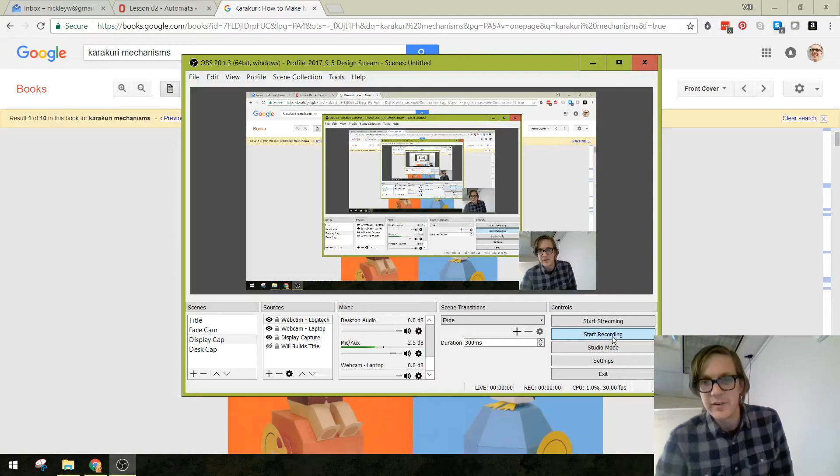So yeah, you guys have been busy making your own automata out of paper, mechanical moving machines. This is one of the books that I pulled some of these machines from. It's actually called karakuri, which I think is the Japanese word for little moving machines. It has a couple different meanings. Anyway, karakuri, automata, for this class, they're interchangeable.

Your assignment in class was to build one of these things, one of these paper models, so we can see how some of these common mechanisms work. If you don't finish in class, build them over the weekend and bring them with you on Wednesday.

Now, the other part of the assignment for Wednesday is to use SolidWorks to build a working assembly representing one of these paper models that you've made today. You don't have to build the one you built in class. You could build someone else's if it's easier for you or more interesting to you. I have a whole book of other ones too, so before you leave today, if you want to take a look at some of the other mechanisms and automata that you could build, just come up and grab one.

For today's demo, we're going to be in SolidWorks, and I'm not going to talk so much about how to build each of the components. With a semester and some change under your belt, building basic components should not be the hard part of the assignment. I'm going to leave that to you guys.

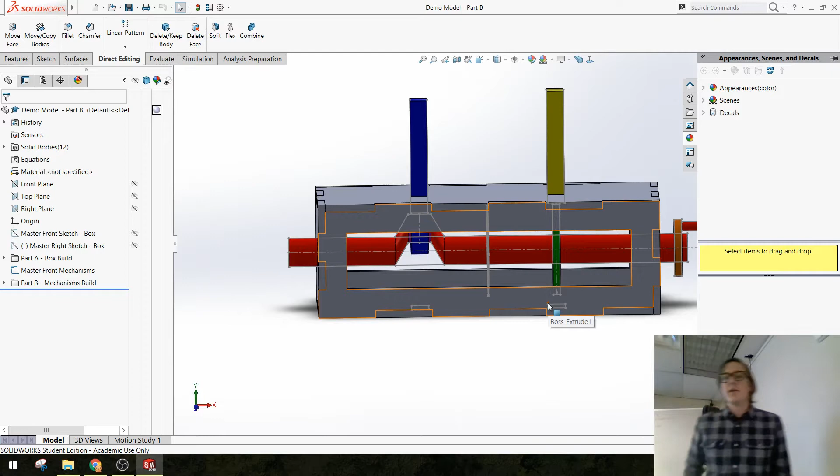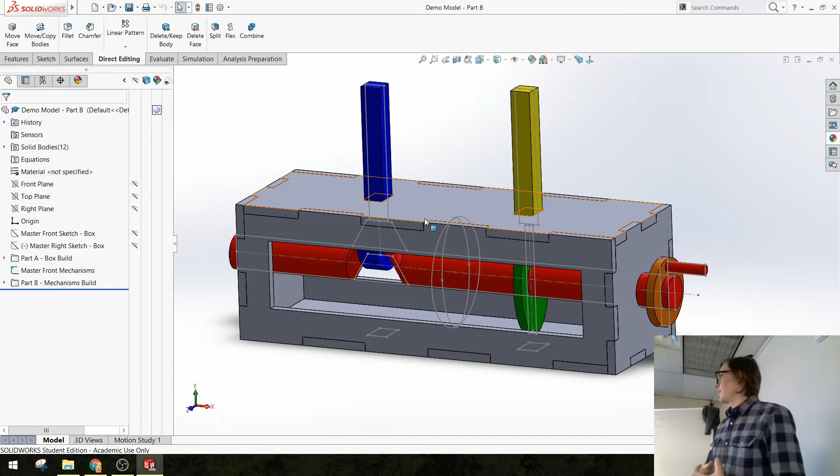While you guys were busy building your paper stuff, I started building two really basic automata mechanisms into my box model that was due today. I do want you guys to use your box model as the base geometry for where your mechanism is going to fit. This is all in a part file, so none of this stuff moves just yet. We're going to go over the process I would go through to export these as individual parts, bring them into an assembly, and mate everything together so that it actually works and represents these two mechanisms.

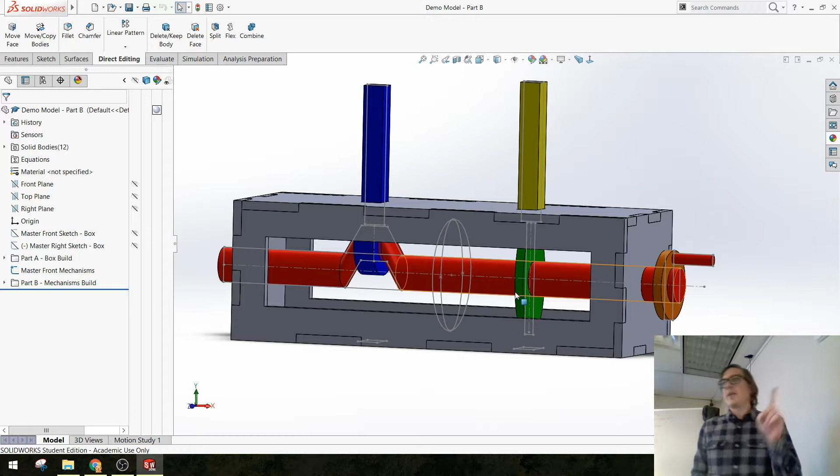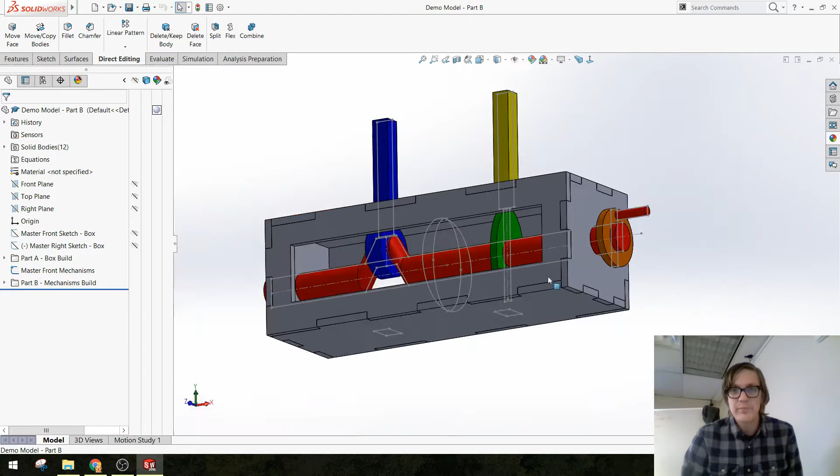You only have to do one mechanism minimum, but feel free to do as many as are in your paper model. As with most of these things, there's a drive shaft. In this case, it's this red piece with a crank on one end. So this is going to turn. The two mechanisms in this demonstration are a cam and cam follower. The cam in this case is just an oval cam. If you can't imagine what the cam follower's motion might be when this shaft turns, we'll see pretty soon in SolidWorks.

The other mechanism we have you could describe as a crank. It's an offset of our drive shaft, and then we have a member that's tied to one end. You could probably find an example of this in your paper models. A lot of you guys are doing cams and cranks. There are other types of mechanisms that aren't in this demo but that you're more than capable of building, things like gears and rack and pinion. There's a lot of other really cool things out there.

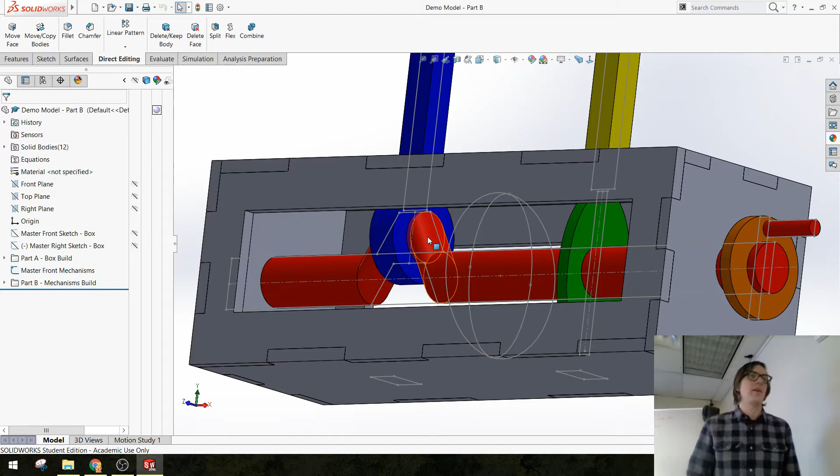So definitely try and build something that you've actually built in paper for this next assignment, to take some of the guesswork out of it. But for the later parts of this assignment, don't feel limited by just the two examples that we're building today or that you build in the next few days for part B of lesson 2.

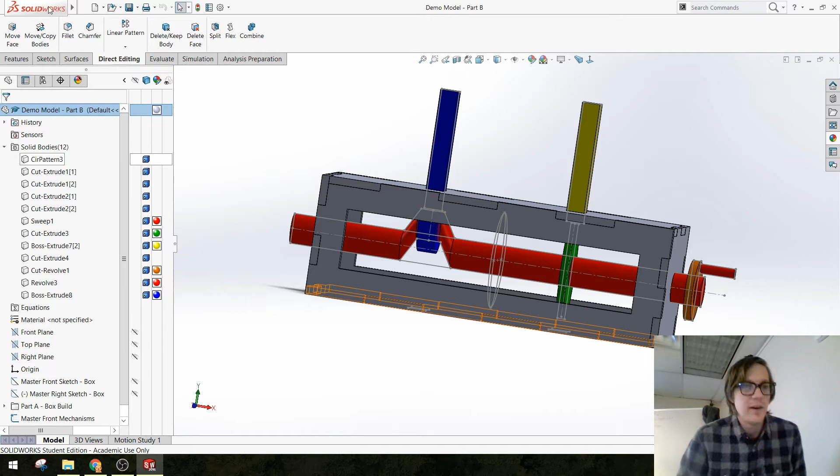Okay, so right now I have a part with a bunch of different solid bodies. There are a lot of ways to export bodies from a part as individual parts so you can bring them back into an assembly. I'll show you the way I typically use. One thing that'll make your life easier is to go into your solid bodies folder and name these something that makes sense to you, like box bottom.

I'm just going to go through and label everything: box front, box rear. The reason I'm changing the names is that when I export them, they will keep the name that I gave them. Let's see, box, I guess we could say left side.

Box. Right side. Drive shaft. Cam.

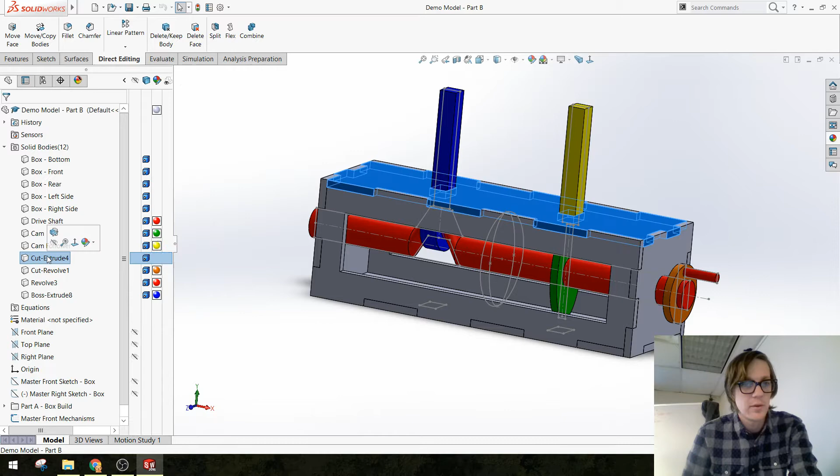Finished? You got two finished guys over here. All right, cool. Actually, I might borrow one of these to show in the video really quick.

Does it not have a box? Do your instructions have instructions for a box? Weird. So no, I guess yours doesn't have one. Drive.

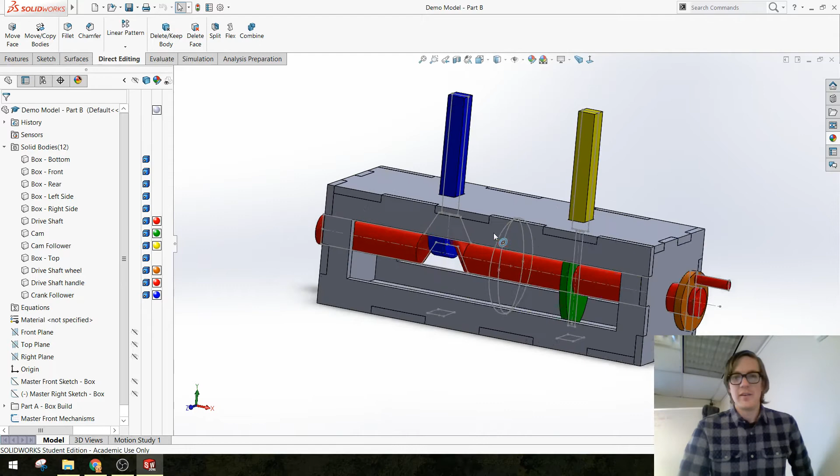Okay, so I've named all of my solid bodies here, and the easiest way to export these is to pick them while holding shift, right click, and then say insert into new part. And you know what? There's another way that we can do this too.

Yeah, insert into new part. That's fine. Okay. And it's going to ask you to put it somewhere. I'm going to drop this in a folder for part B.

All right. I wonder if I can do more than one at the same time. No. Okay. So I guess you do need to do this one at a time.

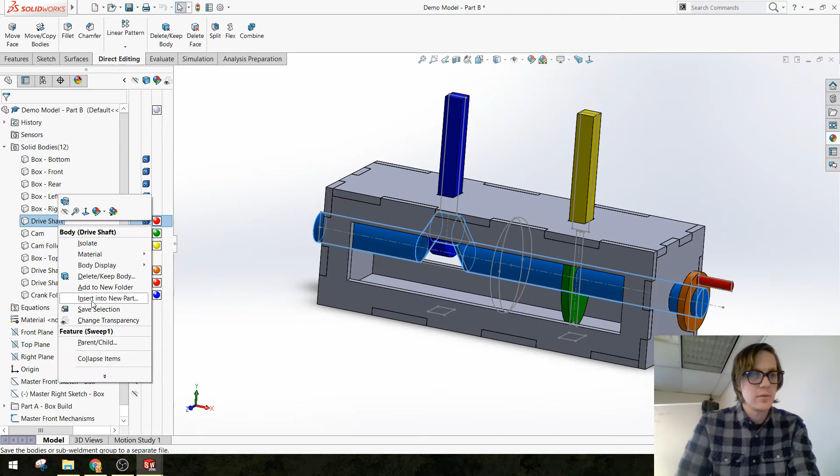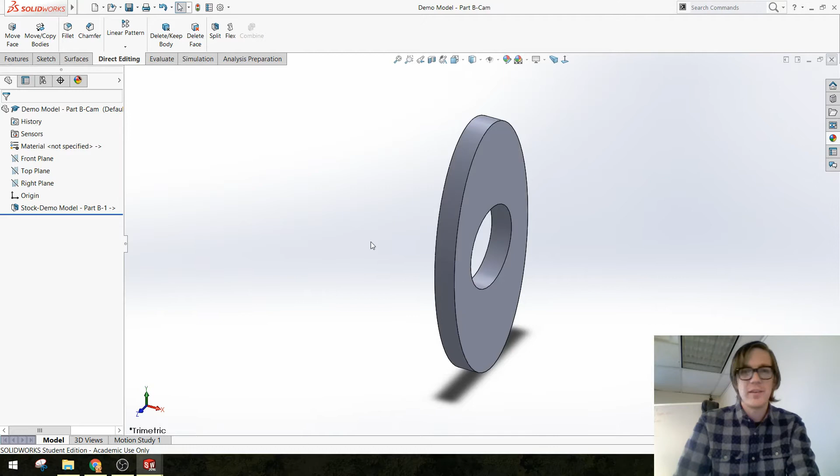All right, the reason we're exporting all of these bodies as their own separate parts is so that we can bring them back together in an assembly and add mates to make them behave the way we want. Yet another kind of tedious and annoying part of SolidWorks.

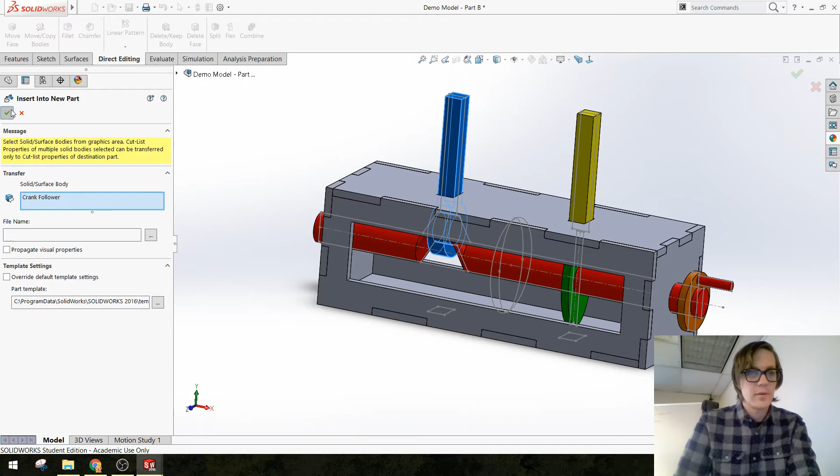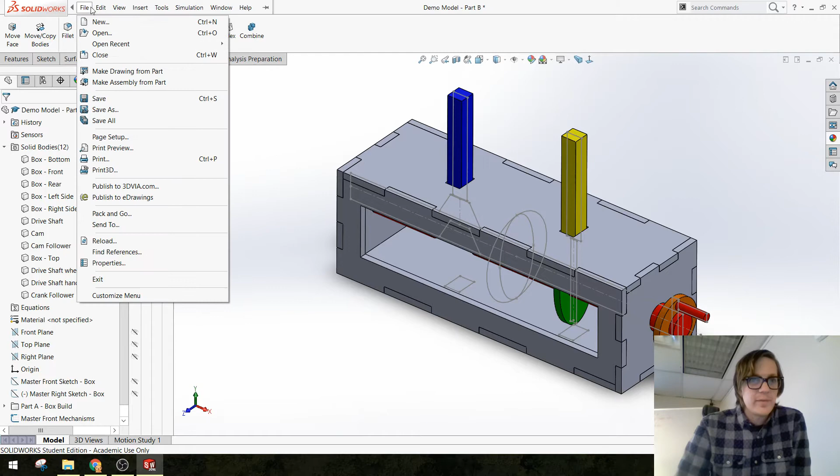lay it down anymore. Okay, so now I'm going to start a new assembly. And this is sort of the process here. Go ahead and start an assembly with nothing in it, and you're going to start inserting components. So I'm just going to browse for my folder full of parts that I just exported.

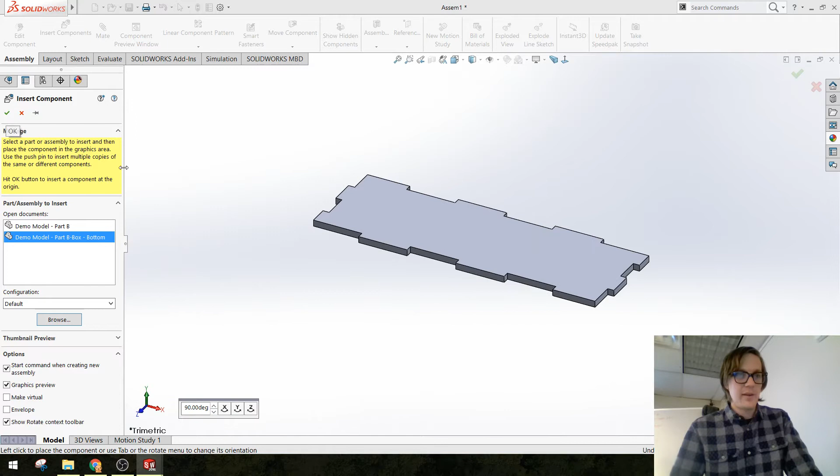And I might start with the bottom piece, and I can place it somewhere, or I can just hit the green check mark and it will lock it in place as the bottom. That's what I want to do to start. So I'm going to build up this box first.

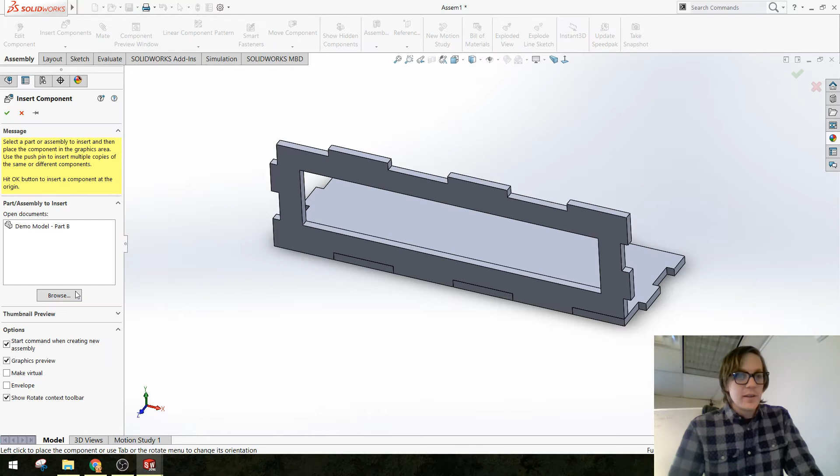And if I just hit the green check mark, a part will come in exactly the same position that it was in the part file. So for parts that aren't going to move, like your box parts, that's okay. You don't have to worry about mating them together at all. They'll just snap right into place.

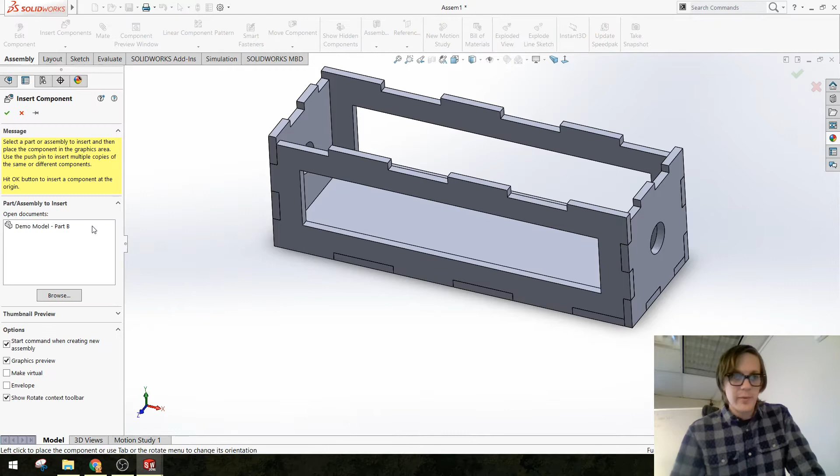And then I guess we got one other part here, top. Okay, so there's my box. There are a bunch of different parts in my assembly file, and I'm going to save this really quick as my part B assembly.

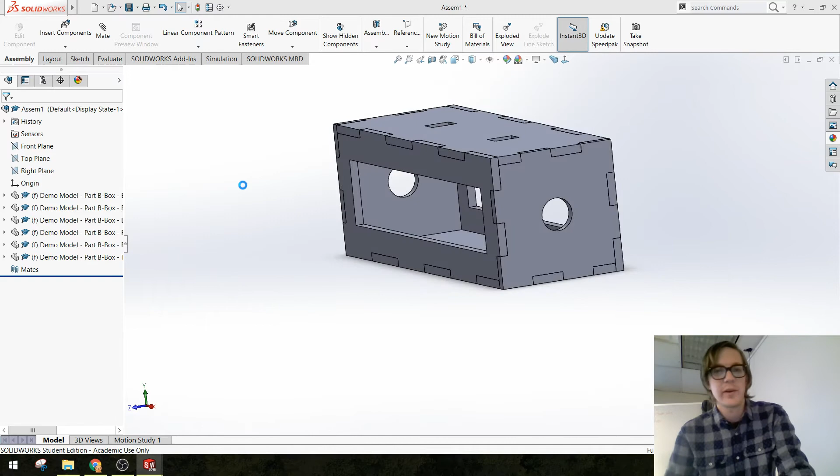Okay. So now is where it gets a little more interesting. I'm going to start inserting some of these components that actually move. And the first one I'm going to do is the drive shaft, since it kind of drives everything else.

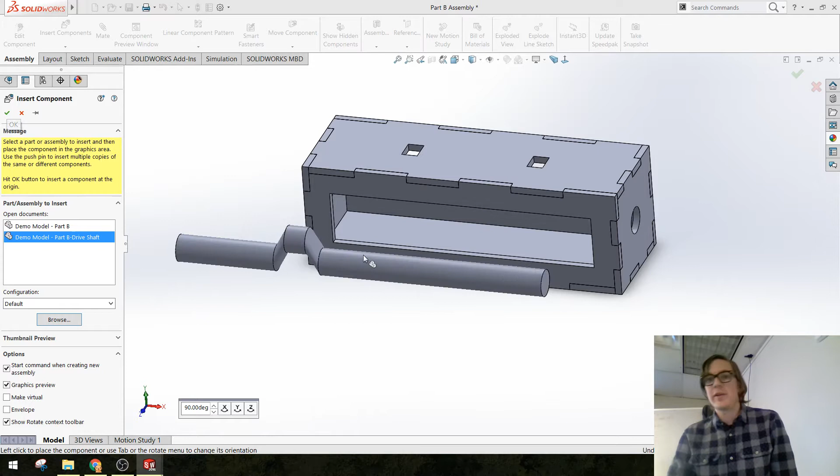Instead of hitting the green check mark so that it drops it exactly in place and also locks it in place, I'm just going to pick a spot somewhere out here. And you'll notice that if I click and drag it, I can move it around. For those of you who have done assemblies, this is not news, and I know some of you guys already did some stuff with assemblies and mates with the Nerf project last year.

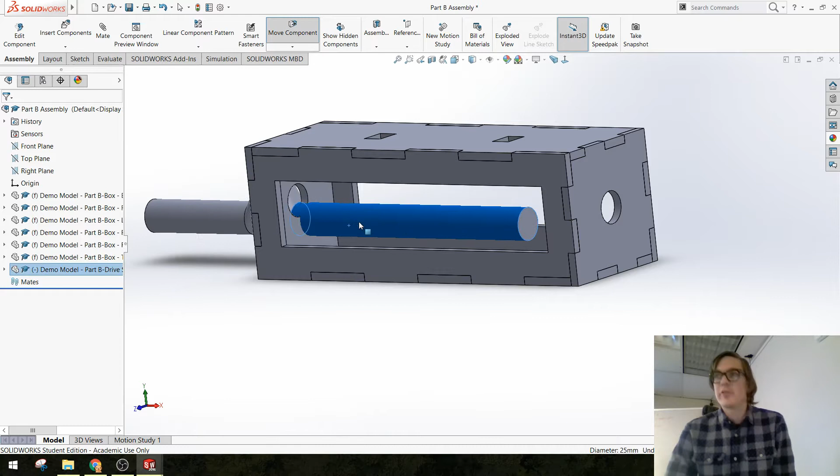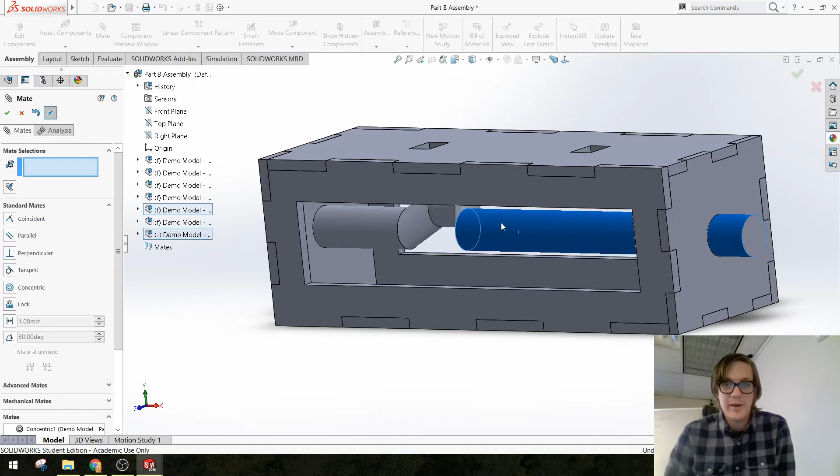All right, because we want this to eventually be able to move in a controlled way, to spin around its axis, I'm going to add a couple of mates that restrict it in just a few dimensions. So I did a concentric mate here, so that now you can see I can drag this part back and forth, but I can't move it up and down, left and right. But you'll notice it can spin around its center, which is nice. A concentric mate allows for that to happen.

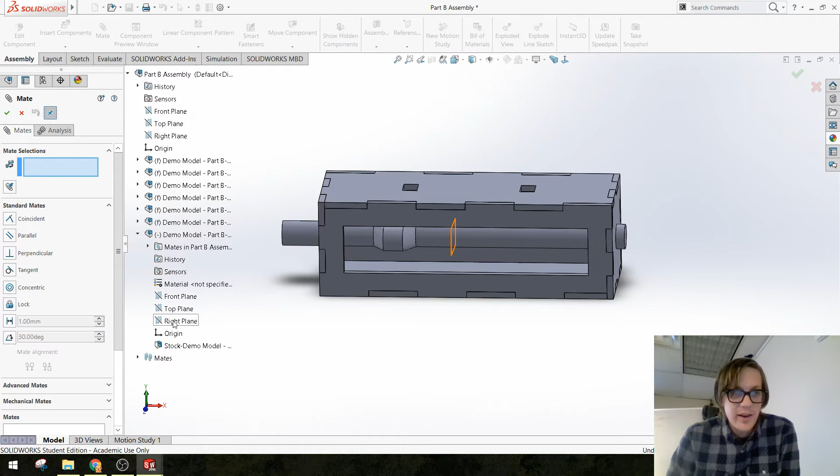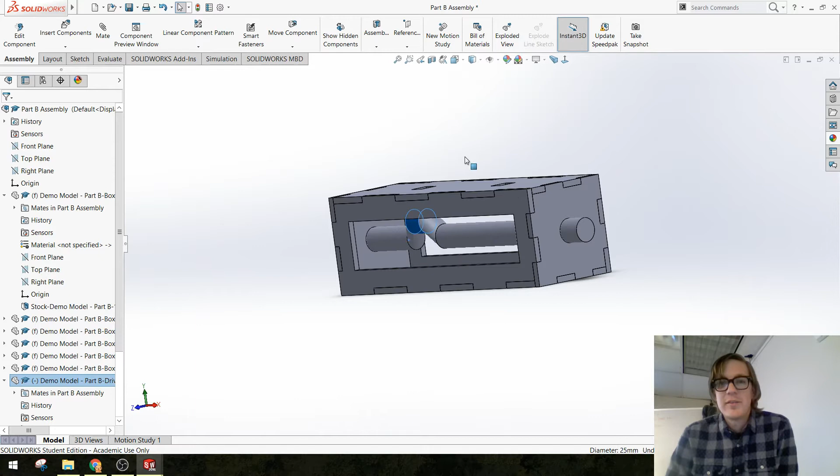The next mate that I'm going to do is one that ties the center of my shaft. And I can actually do this with the origin of this drive shaft. If I open this model up and say the right plane, I can mate it to the right plane of any one of my box parts. And I'll just say green check mark. Okay. Now check this out. It shouldn't move back and forth, but I can actually turn this crank around, which is pretty good. So that's one step.

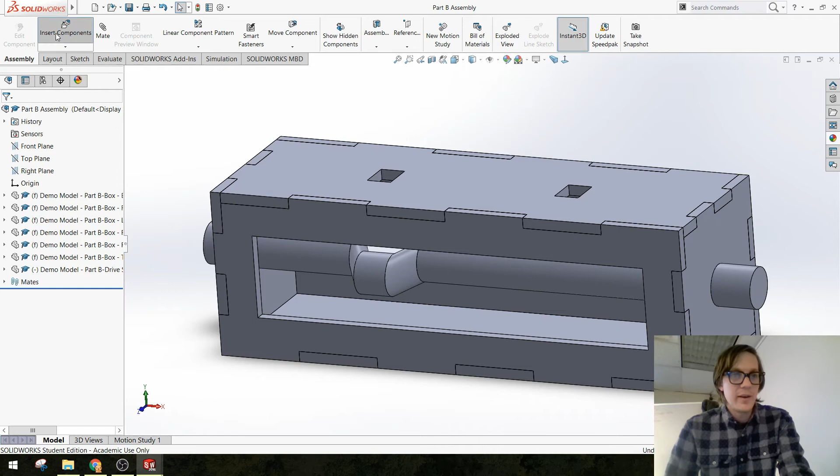And with those two mates, you should be able to constrain your drive shaft. Whatever else is on it, it's ready to go. I'm going to close these parts down because there's actually a lot of information there. I'm going to save. Okay, let's bring in another part, the other crank thing. So we have the drive shaft handle, and I'm going to bring in the, what did I call it? Drive shaft wheel. Okay, now let's mate these guys together.

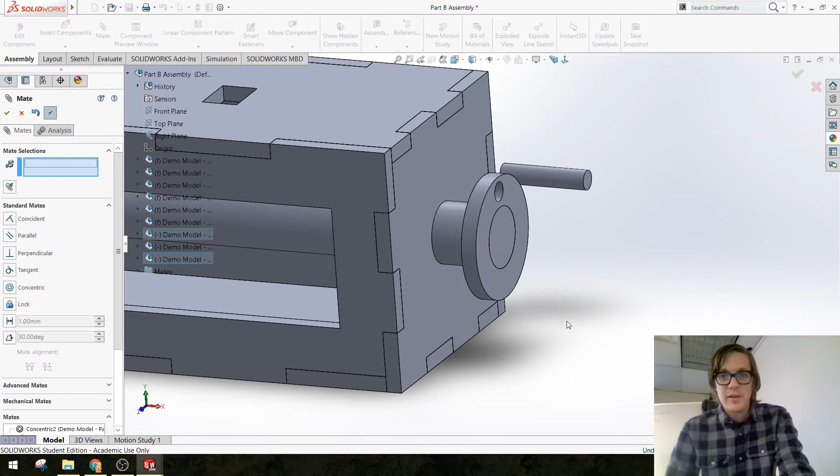So same thing. It looks like the inside of this should go around the outside of that. Green check mark. I might just make these two faces coincident. And just to test, if I start dragging this thing around, yeah, it actually moves around in a circle. And it doesn't move forward, backward. Notice there's one other thing that isn't happening. I want, when this thing spins around, the whole shaft to spin around.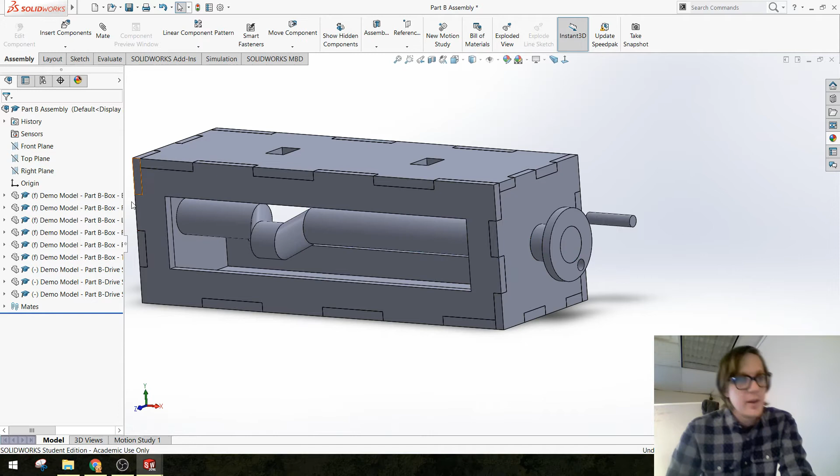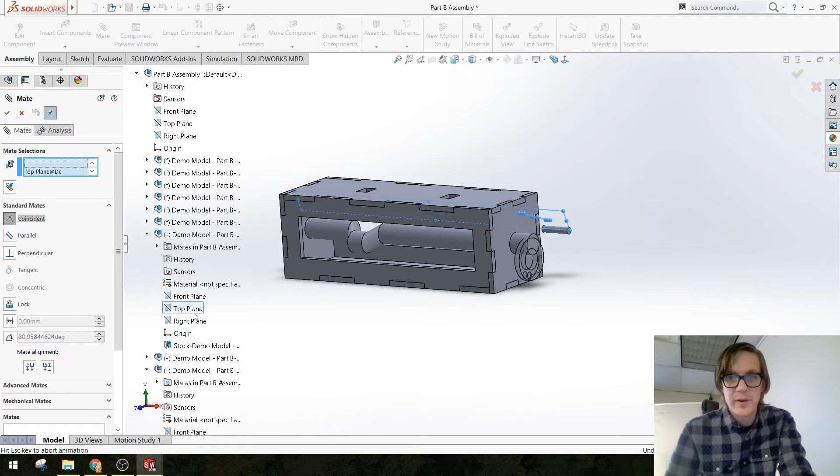So I'm going to create a mate between, let's say, the top plane on my wheel part and the top plane on my drive shaft part as well. And we'll see if that works. Okay, let's say green check mark, get out of here. All right, can I move this? Yeah. Okay, we're getting there. Now let's just keep adding mates to all of this stuff too.

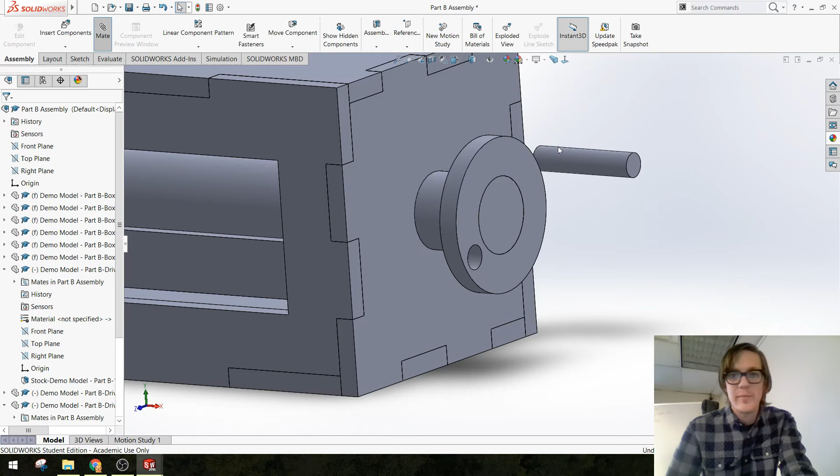So that handle is supposed to, oh, not insert component, my bad, mate. These components need to be concentric. Maybe I want, let's move this out. I want this to be even here. Okay. Let's try this out. If I turn the handle, everything's moving. That's good. And you save.

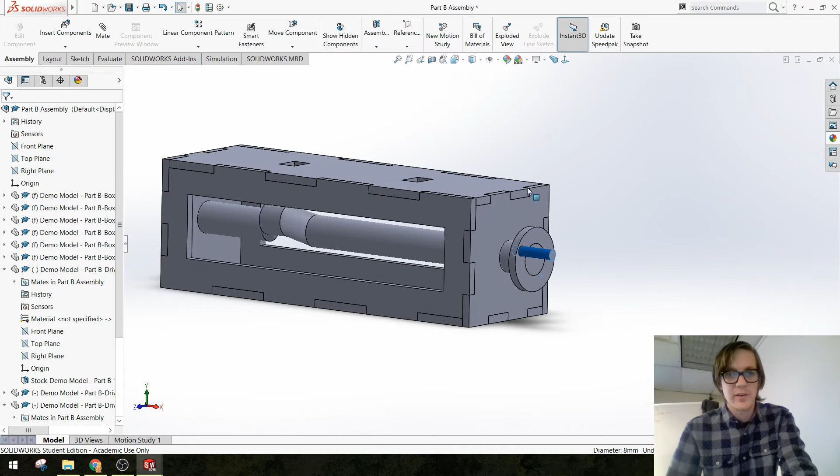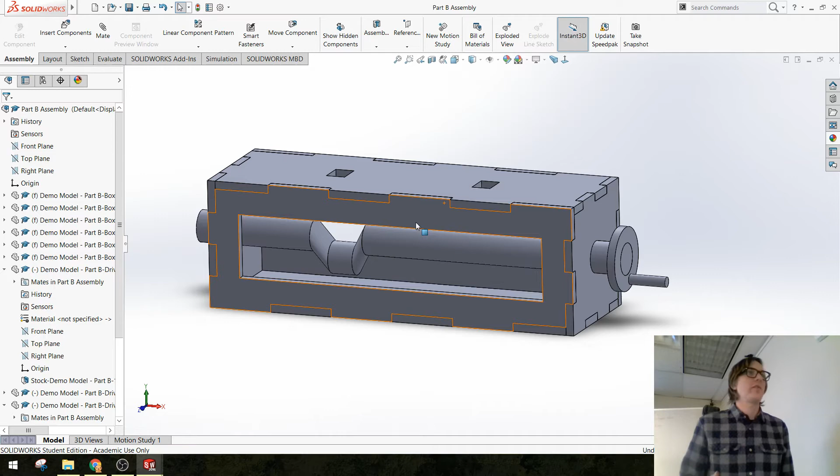Okay, that might take you guys a few tries to bring your parts in, add a few mates to get your drive shaft working. That's probably the first step in this process. Then everything else, just like in real life, is based on the position of the drive shaft. Once your drive shaft is working correctly, you can start importing these other parts. Okay, so let's do the crank follower. It's this guy, kind of looks like a key.

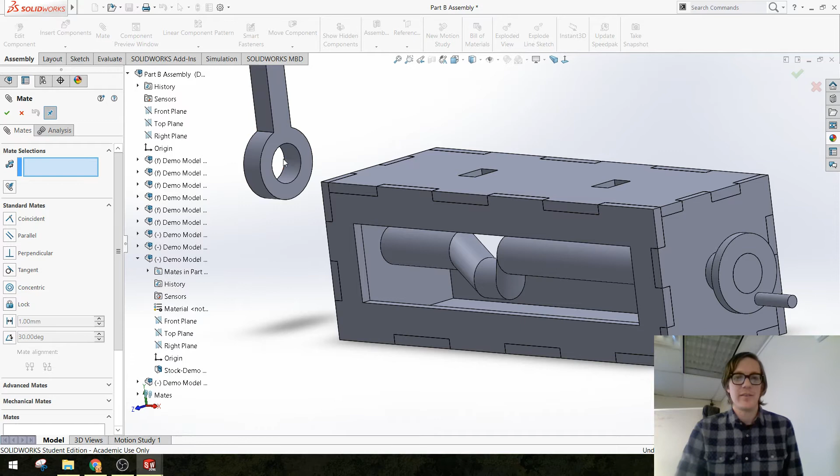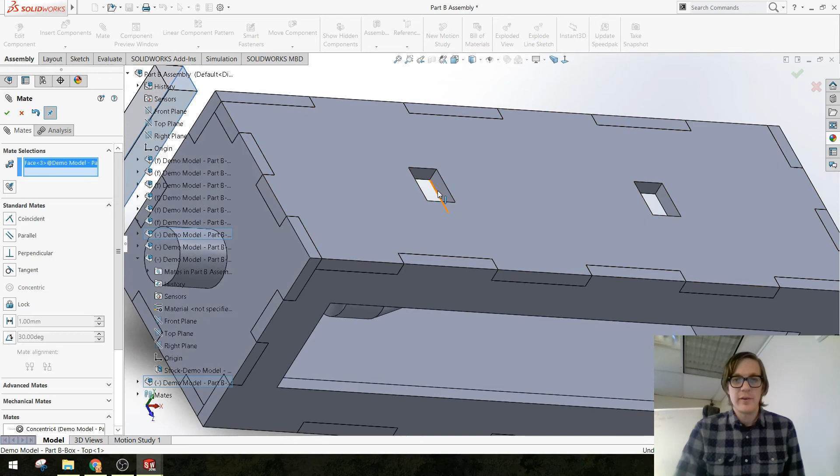Any ideas what types of mates I might add to this guy? Yeah, Liam. Concentric, here, somewhere on the drive shaft, right? Yeah, down here. Okay, what else probably needs to happen? What do you think, Dexter? Can't you mate the bases of the side of the key shaft with the hole? Yeah, you could. Okay, we'll try that out. So mate these guys, and I'll say okay.

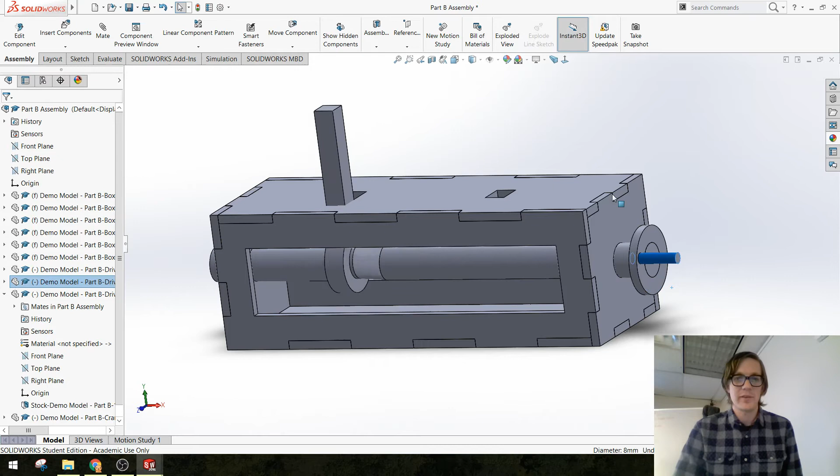Well, let's see what happens with how it is right now. All right, so I'm gonna move this around. Okay, so part of it looks like it's working right. The bottom part of this looks right, but it also looks like the crank follower is moving around outside our hole there.

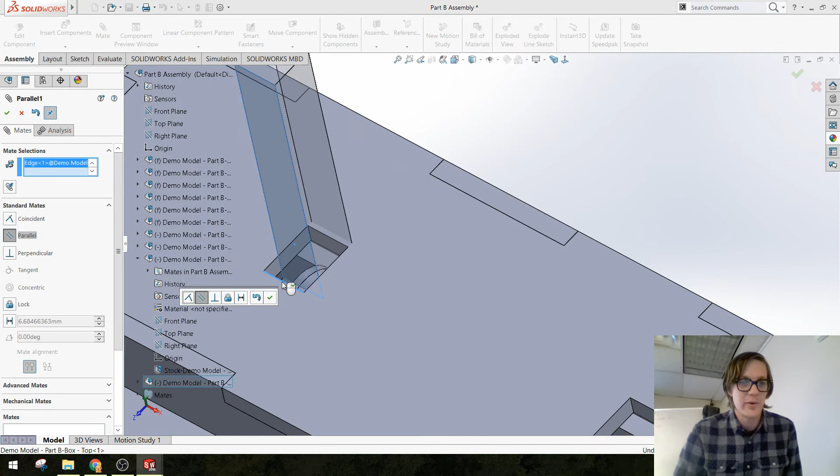All right, there are a couple ways that we can do this part. The first one I'm gonna try is a mate between this face and where it might slide along this corner right here. And not parallel, I want it to be coincident. And let's just see how that works.

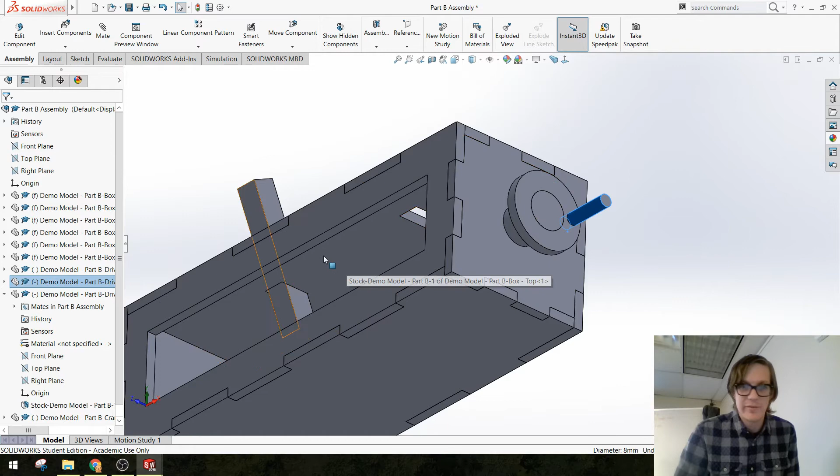Okay, actually that looks pretty right. Now, technically, see how it's kind of interfering with the bottom of that hole down there? That's fine. Probably the actual right way to do this would be to set up an axis in the middle of the hole, and also an axis in the middle of this part, and mate those two axes together. But that's getting into it a little bit much.

For this first exercise here, what I really want you guys to try and simulate is the motion. So that looks like it's behaving correctly to me. It is tied to the hole, it's also tied to the drive shaft, and most importantly, the top of that crank follower is moving in a way that is actually opposite of the drive shaft. Pretty cool.

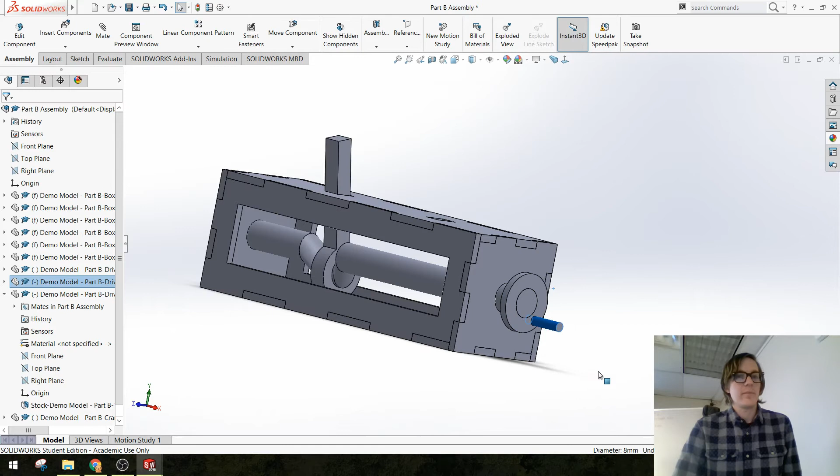And just like this line that I'm using here, you would probably set the axis in the hole, and you would set like an axis, a mid plane in the middle of this part to slide along that axis. Again, we're at this point just trying to simulate the motion.

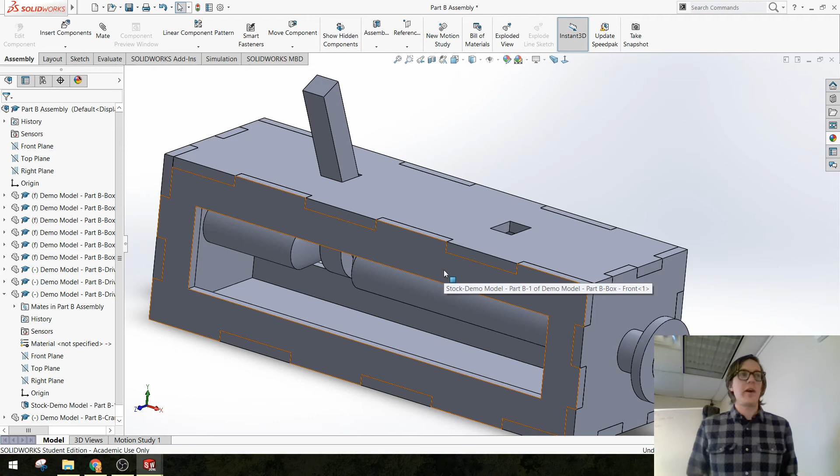I think because the requirement here was we have one part that's sliding and another part that's static, we need to find a mate. In this case, a face to a line will allow that to happen. I'm sure you guys could find another way to make that happen too. Like everything in SolidWorks, there are a million different types of mates. You can go crazy with this kind of stuff.

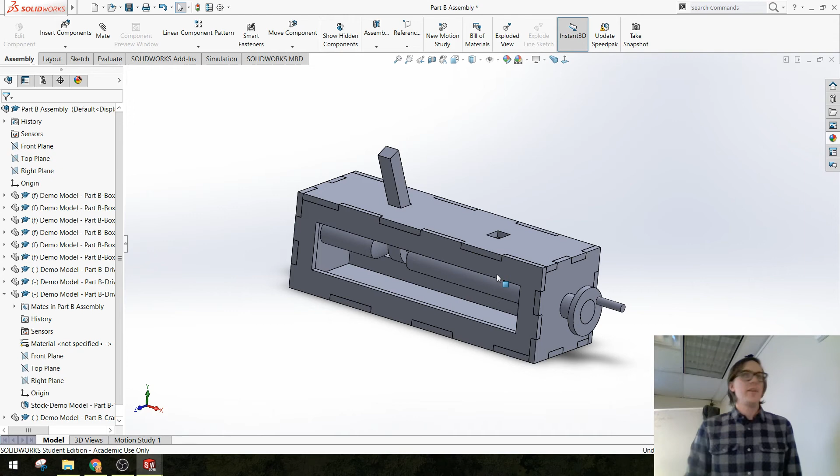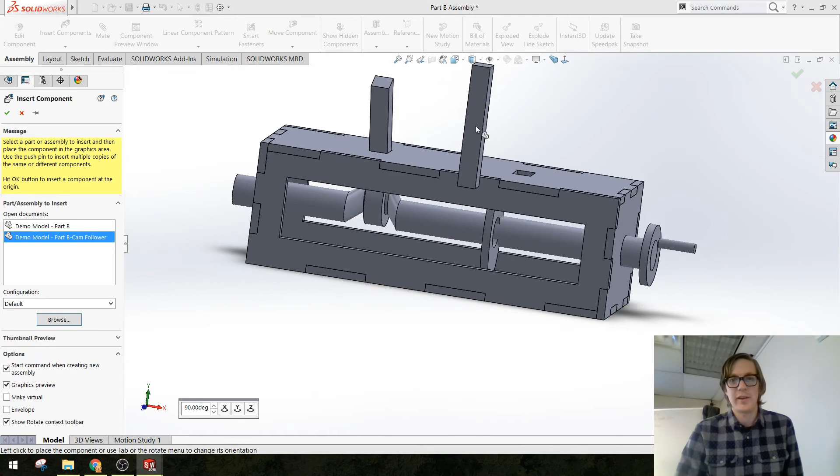All right, so the next one I want to try is the cam and cam follower. So I'm going to insert a couple other parts. We have our cam, and we have our cam follower, which in this case is literally just a block. That's fine, it's been abstracted.

All right, any ideas here on mates? Someone who isn't Dexter or Liam. What's a mate that you guys could add?

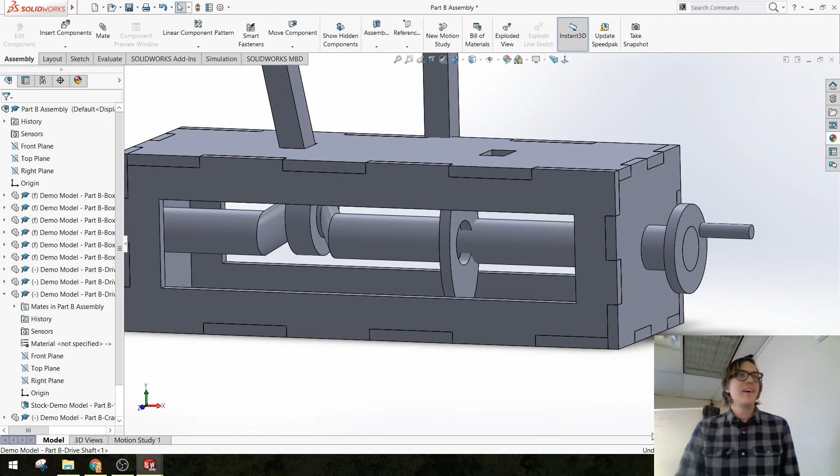Concentric what? Use the terms. So concentric, this thing is called a cam, that's the drive shaft, this is the cam follower. Help me out here. That's perfect. Yeah, make the drive shaft concentric with the hole in the cam. Thanks, I know, it's technical.

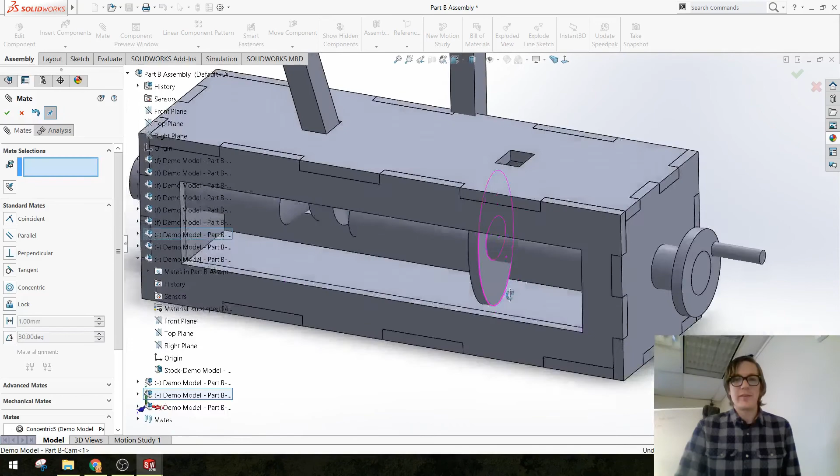Okay, what else? Right now this part still moves around kind of crazy. It doesn't look like it's tied to the motion of our drive shaft. How could we tie those two together?

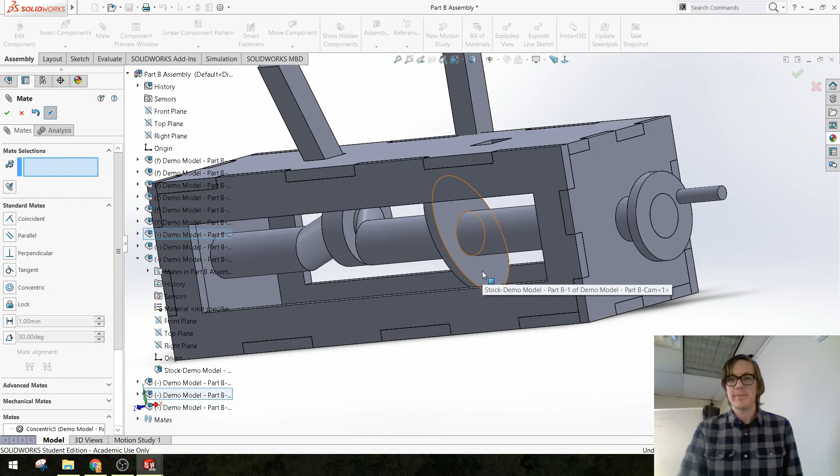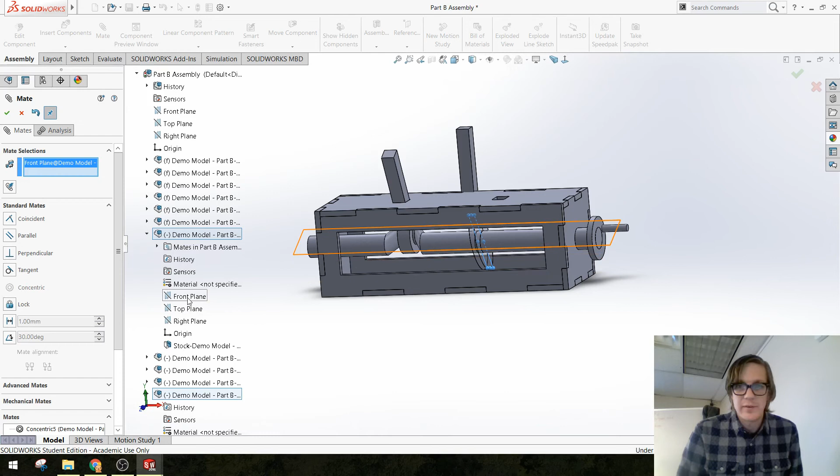What do you think, Tessa? Can you make one of the planes of the cam mate with a plane of the drive shaft? Yes, exactly, that's one good way to do it. So we're going to mate one of the planes on this cam with one of the planes on the drive shaft. It's probably this one. Okay, we'll pick front plane, and where is our drive shaft? We'll try front plane, sure.

Okay, let's drag this around and just see what happens. Yeah, okay, it looks like it's moving. This thing still moves side to side, so give me one more mate that might keep it from moving side to side. Someone else, what do you think, Cole?

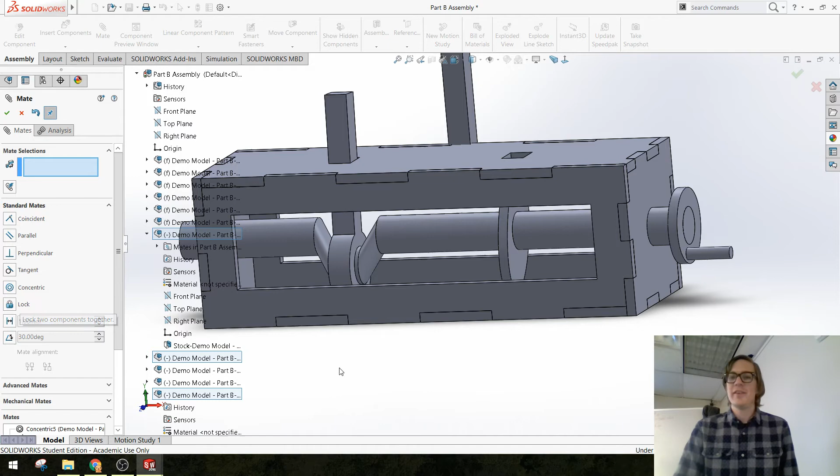I don't even know the words to call it. Got me on this one. Okay, Mitch? The lock mate? Down on the left, bottom left, probably one, never used it, looks like it. Yeah, it's one that I generally avoid because it can lock things in dimensions that maybe you didn't intend. I'll give you, well, all right.

This one, probably want to do like a flat face to another flat face. That should keep those flat faces from moving with respect to one another. And it's just a coincident mate.

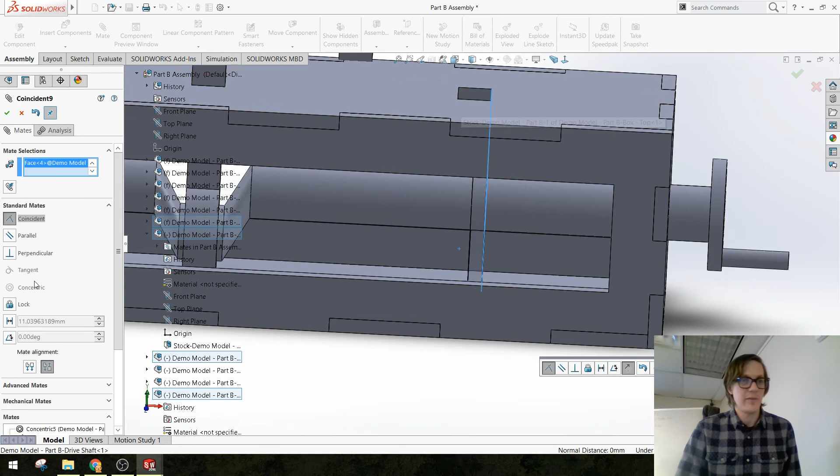Now, if it bothers you that this cam is sort of off center of this hole, another type of mate that will still sort of lock it in place is a, what is this called? Just adding a dimension, distance. So I might say keep it 5 millimeters. Just kidding, it just didn't do it. Did it make the mate?

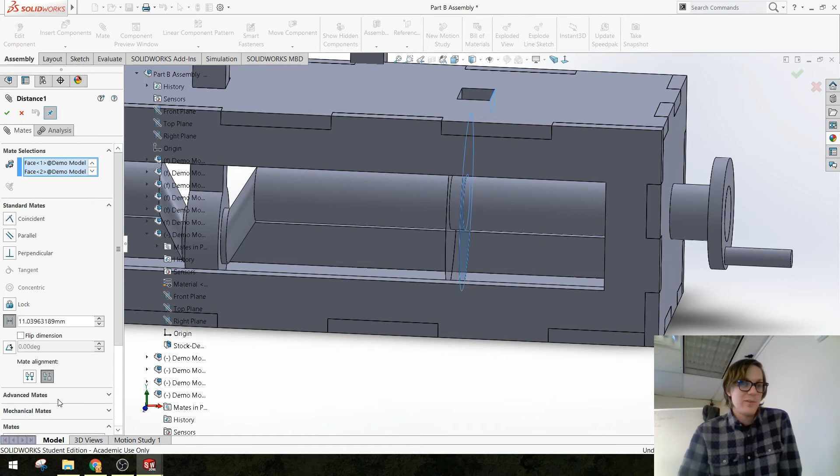Let's see, it did. So I'm going to go in, you can edit mates, which is kind of cool. I'm going to go back in here and change the distance. There's my num lock on or something, that's weird. There we go. See how it's putting a distance of 5 millimeters between those two faces? I think that centers it up a little bit more.

All right, let's twist the handle. Okay, so it looks like it's spinning. And if I click it and move it, it's not moving in any way that I don't want it to move.

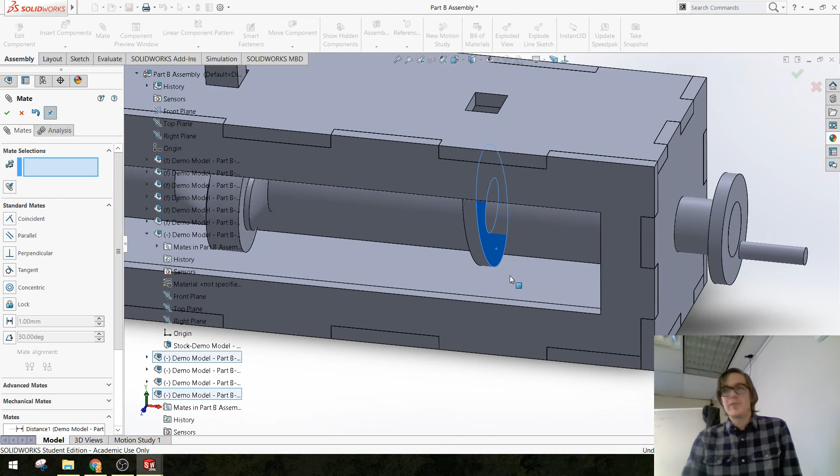That's again sort of like high level what you want to try and do. After you think you have a part constrained, grab it and move it around with your mouse and just make sure that either it's not moving at all or it's only moving in a way that you expect it to be able to move.

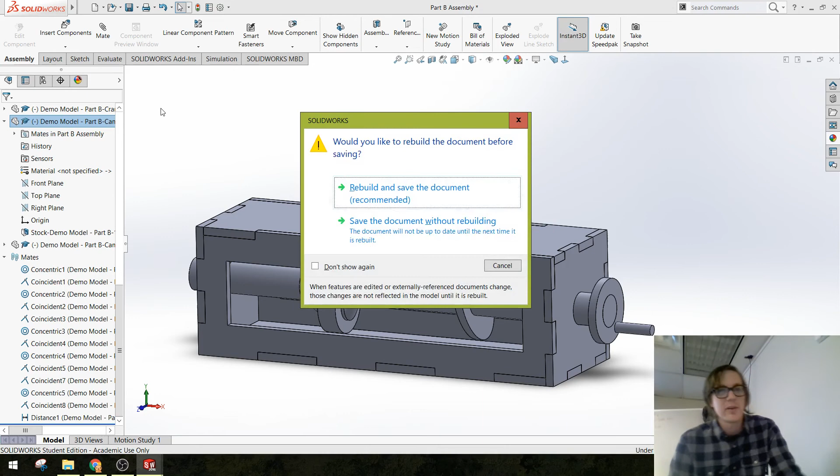All right, so last but not least, we have our cam follower. Let me save really quick. And with this one, just like the last one, we want to line this up with maybe the edge of the hole.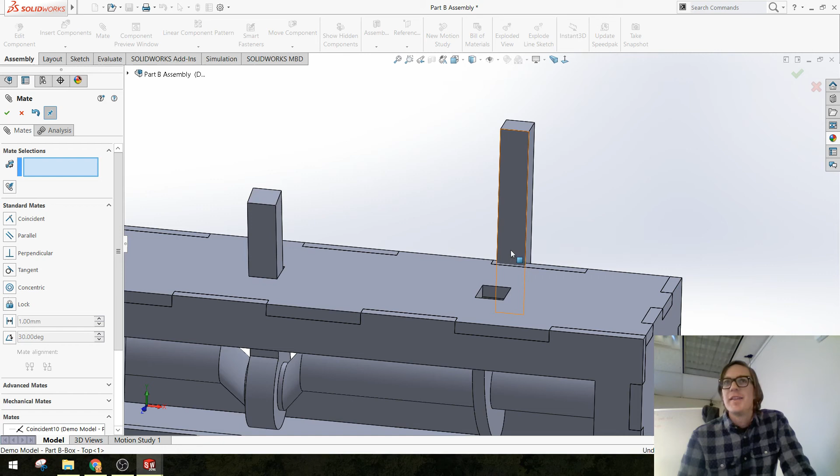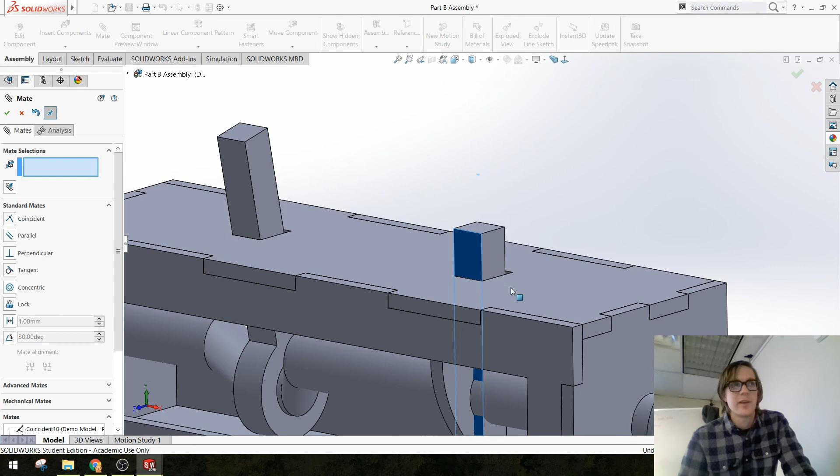Any ideas for other mates? All right, this one gets a little tricky. Now, this particular member, I'm going to also mate here to the front of our hole. I could do a distance if it bothered me that it was not in the center, because I know that this thing will actually just move up and down as it follows the cam. That's usually how cams work in this case, they kind of ride with gravity on top of wherever that wheel is.

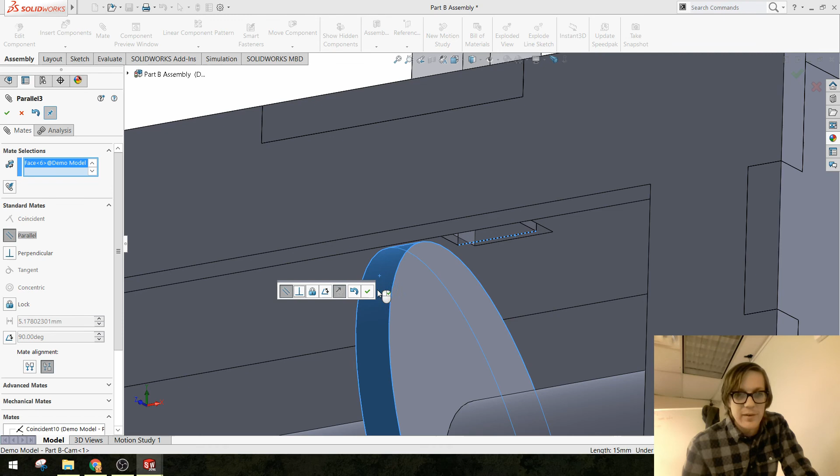Now, there are a couple ways that we can make this surface always follow this surface. Oh, it didn't add it for me. Sometimes you can just do a surface to surface mate. If it doesn't like that, you can do an edge to surface mate. Maybe, yeah, did it add it?

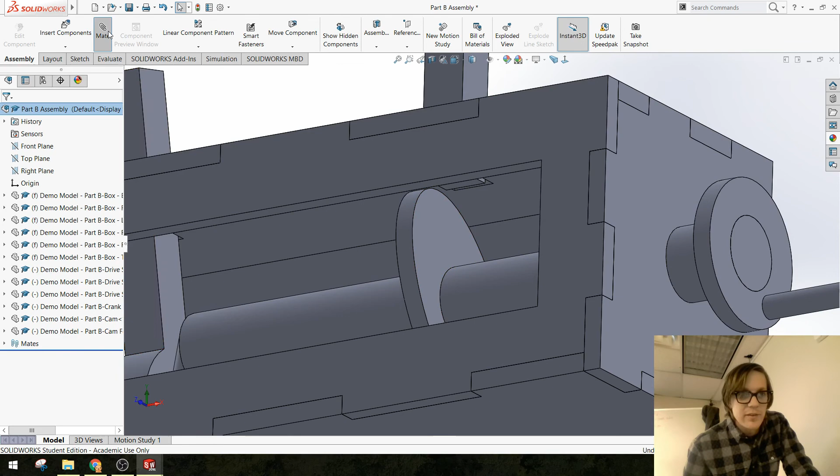Hold on a sec. Yeah, that's not right. Let me delete this. And what I'm trying to avoid, there is a cam and cam follower mate option, but that can also get kind of confusing. Let's try this one more time. So that surface to this. Yeah, this is all recorded. No, I don't want that.

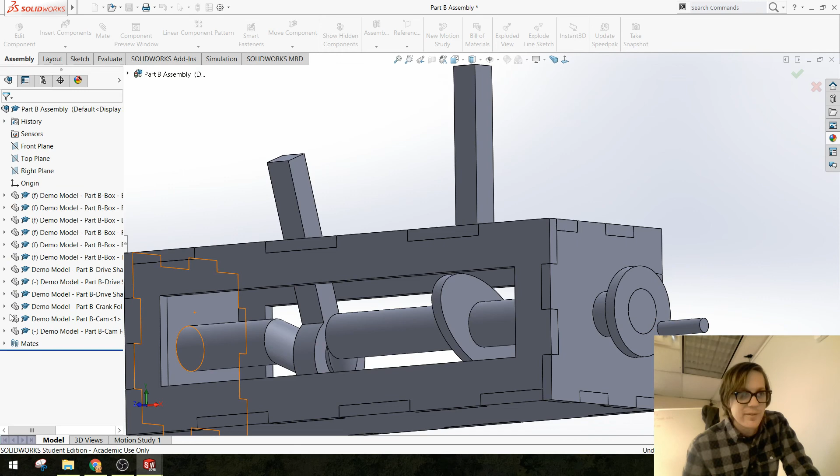Alright, you know what, let's add it and just see what happens. I don't think that's what we want. No, alright, let me get out of here. We might be able to do an edge to edge. I'm just trying to not get into these more advanced mechanical mates, but okay, there is a cam and cam follower option, I'll show you.

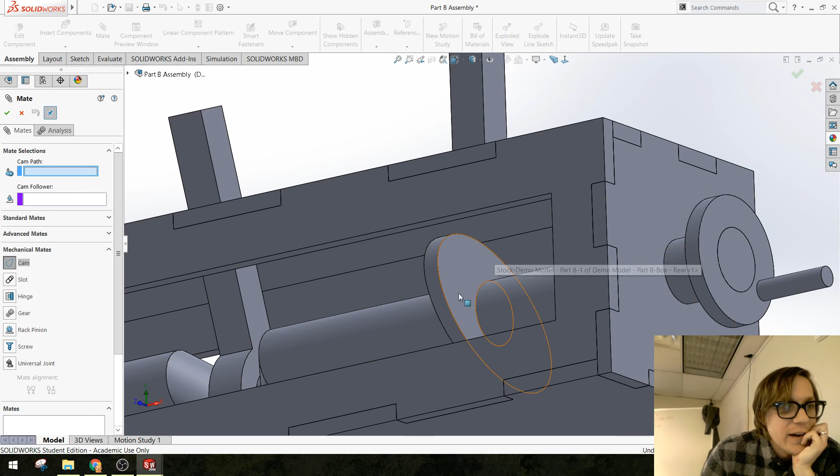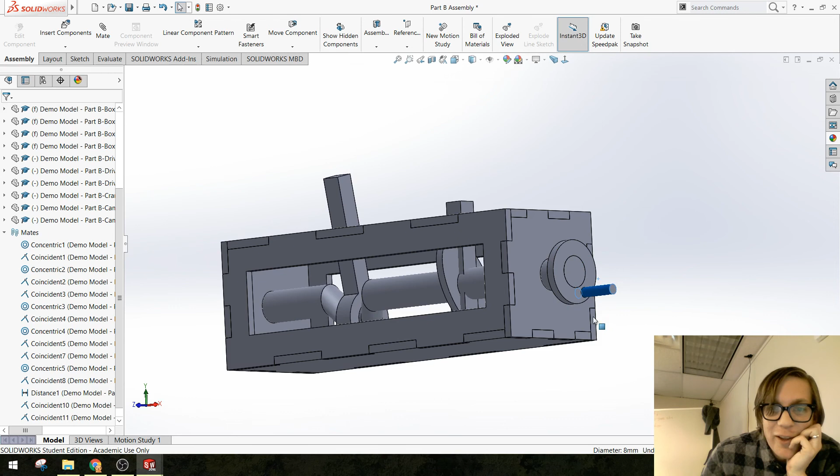I mean, we'll just do a cam and cam really quick. So the cam path is this guy, and the cam follower is that guy, and I'm just going to say okay. That's fine, let's see what happens here. Oh, interesting, it is following it, but it's following it on the bottom, which isn't great. It gets the point across.

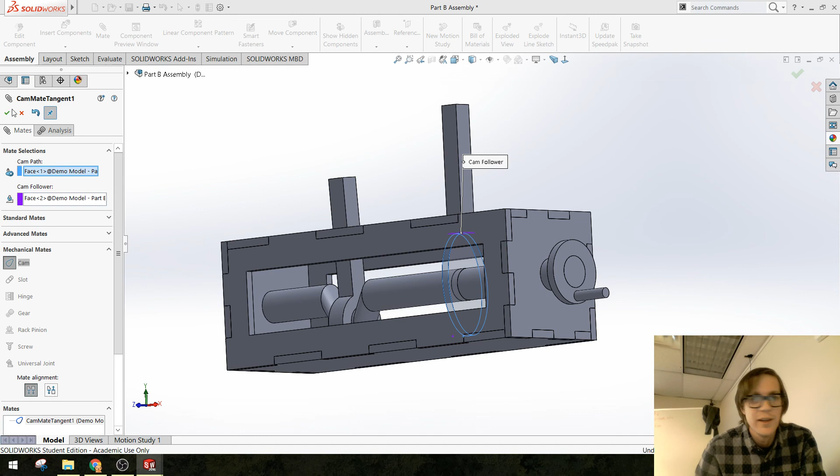I wonder if that's something I can adjust here. Yeah, let's try that. So usually mates have an alignment setting, whether you want them to be face to face or parallel, they call them aligned and anti-aligned. Yeah, that makes sense, that's fine. Let's see if that does the trick here. Okay, now it's working.

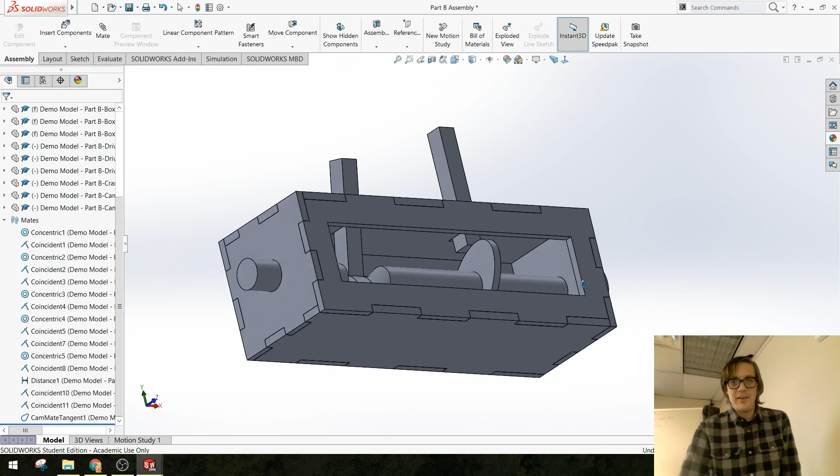Actually, that worked a lot better. I've had bad experiences with the cam mate in the past, and I was like, I wonder if we can get a way around not using the cam thing, but it looks like it's actually working pretty well. So, okay, that's it. And right now we have two different mechanisms, a crank and a cam, running on the same drive shaft simultaneously, and you can kind of see how one's translating this rotating motion to just up and down, and one is translating the motion to like up, down, backward, and forward. It's actually going opposite of our drive shaft.

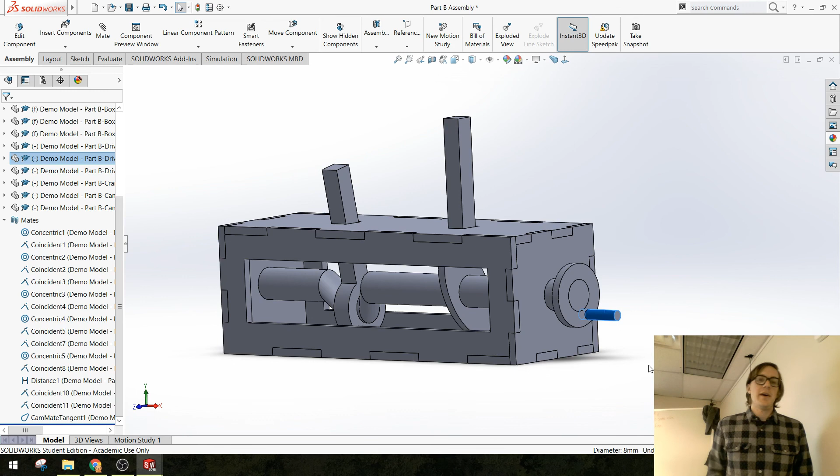All right, hopefully this gives you guys enough to go on. Again, once you already have your parts created, export them from your part file as individual parts, bring them into an assembly, stitch everything together with mates. And what I'm looking for on Wednesday is you're going to submit your assembly. Remember to include it in a folder with all of your part files too. So I need the assembly, and you guys are going to actually show us this thing moving. Or maybe I'll just open it up on the computer and try moving it, alright? Yes, there are ways to do animations like this too, and you hit play and it will just go, but we're not going to do that yet.

Is it just random, like we just make whatever, or does it eventually make sense to...